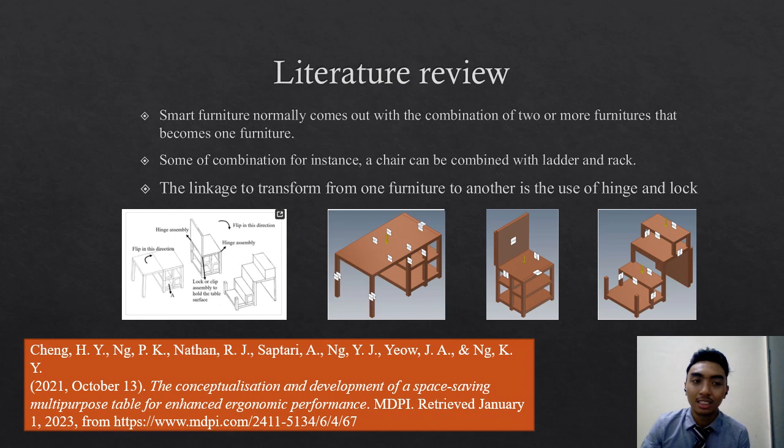The second point that I found in another article is that smart furniture is a furniture that has numerous functions since it is a combination of 2 or more furnitures. The furniture needs to be multifunctional and able to fit in compact living spaces. To prevent young buyers from having difficulty affording expensive furniture because they have a limited budget, the design must also be economical, sound with a reasonable price.

My next literature review finding is that a material that can be used is plywood. This is because plywood is very durable, lightweight, and much stronger than most other wood. This will help the furniture last much longer and surely be worth the price. If plywood is used to make furniture, the furniture will also have more of an eco design.

Let's continue with the problem statement. Nowadays, houses are starting to become smaller, especially those located in large cities. In this case, mostly traditional furnitures were too big and eat up more space, which is not suitable for this kind of house. So users will live in an uncomfortable way because they have small space to live in.

For the objective, it is to build a multi-purpose dining table that combines 2 or more other types of furniture to become one. So house owners do not need to buy separate furniture to fulfill their furniture needs. The next one is to apply basic mechanical joining for the development of smart furniture.

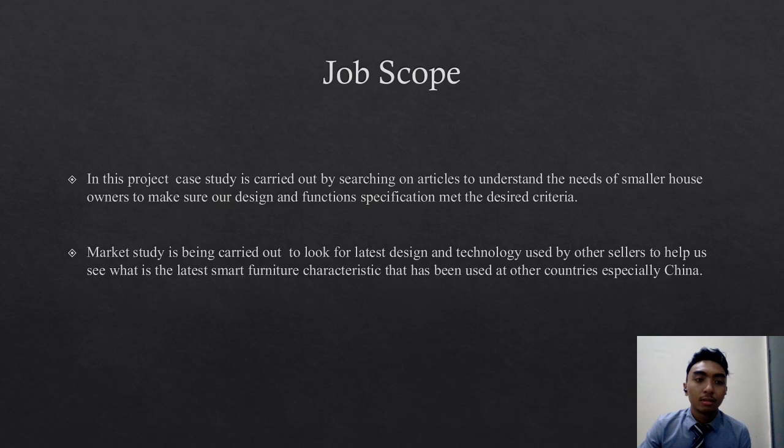So we continue with the materials used for all 3 designs. Design 1 uses pine wood, design 2 uses particle board, while design 3 uses aluminium. The dimension for design 1 is 120 cm x 50 cm x 100 cm, design 2 is 120 cm x 60 cm x 77 cm, and design 3 is 120 cm x 60 cm x 70 cm. The mechanical linkage used by design 1 is the hinge, as we can see in the photo here.

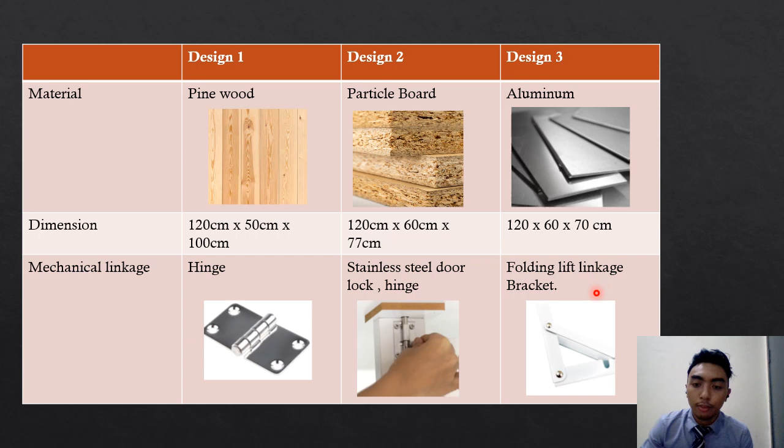Based on the market survey that we have done, there are 3 designs that we came up with. Each design has different specifications. The first design is as shown here. The first form is a rack.

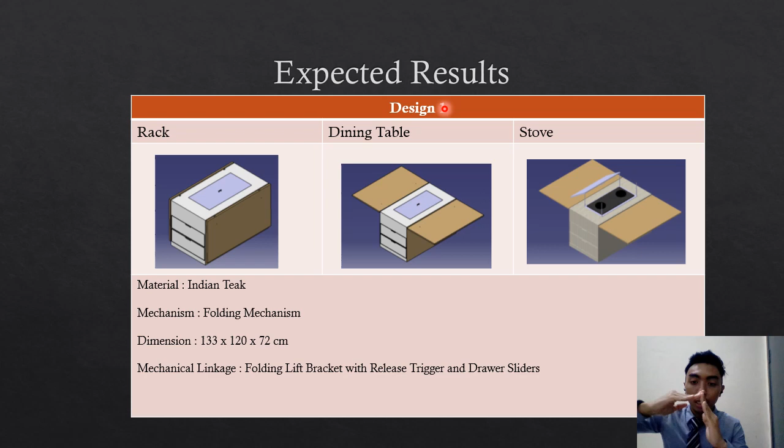It can transform into a dining table. To transform it, we just lift the side of the rack up and wait until the folding lift bracket locks it, and it will make a click sound. To close the table down, you just pull the trigger at the folding lift bracket, and you can push it down to the side as it releases the lock.

The third form is it can become a stove. To access the stove, you just pull the middle compartment upside, and you will get access to the stove. The material used for this design is Indian teak, because it is one of the best woods available.

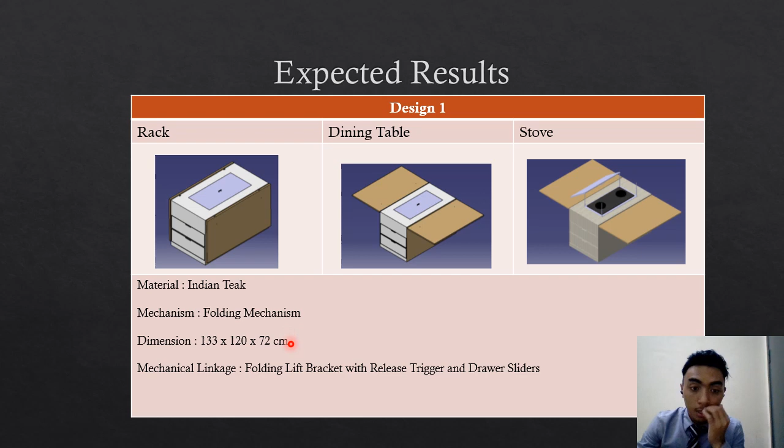The second element is the mechanism, which uses a folding mechanism. The dimension for this design is 133 x 120 x 72 cm height. The mechanical linkage for this design is a folding lift bracket with release trigger and drawer slides.

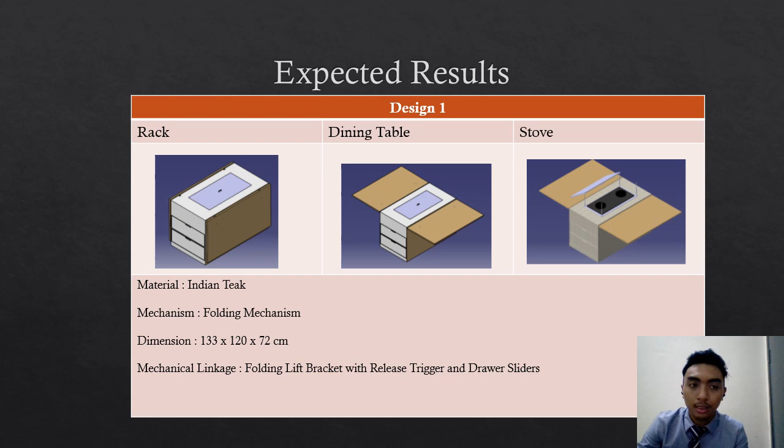For design 2, here is the design. It started as a drawer rack. The second form is a dining table with chairs. To transform it, you just pull the chair backwards until it reaches the limit of the chair railings.

To transform it to the third design, with the liftable hidden compartment, you just lift the middle compartment up and you'll get access to the hidden compartment. The material used by this design is marble and redwood, and the mechanism is a sliding mechanism. The dimension for this design is 130 cm x 87 cm x 72 cm high.

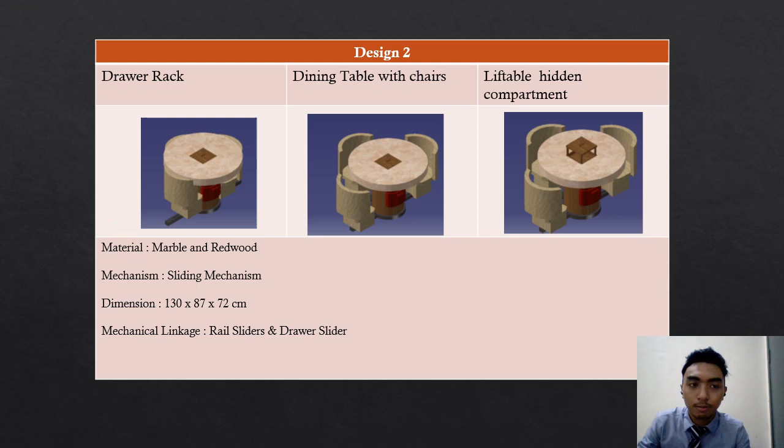The mechanical linkage used for this design is rail sliders and drawer sliders. For design 3, the final design, it started as a rack, and it becomes a dining table by pulling the top part of the rack down, and it slowly becomes a table. Inside this drawer, if you pull up, you can slide out a chair.

The material used for this design is redwood and steel, and the mechanism is a sliding mechanism. The dimension is 120 x 66 x 71 cm. The mechanical linkage is a wall mounted hinge bracket, rail sliders, pin pivot, and spring.

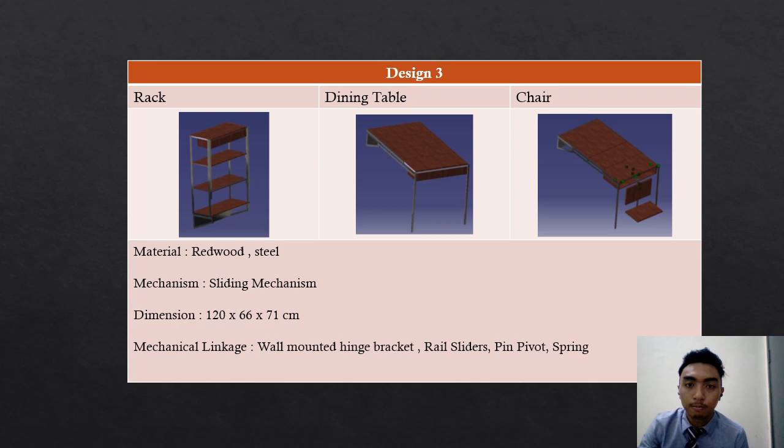So for the mechanical linkage, as I mentioned, the first one is the folding lift bracket with release trigger. The second one is chair rails and rail sliders, and the third one is the wall mounted hinge bracket.

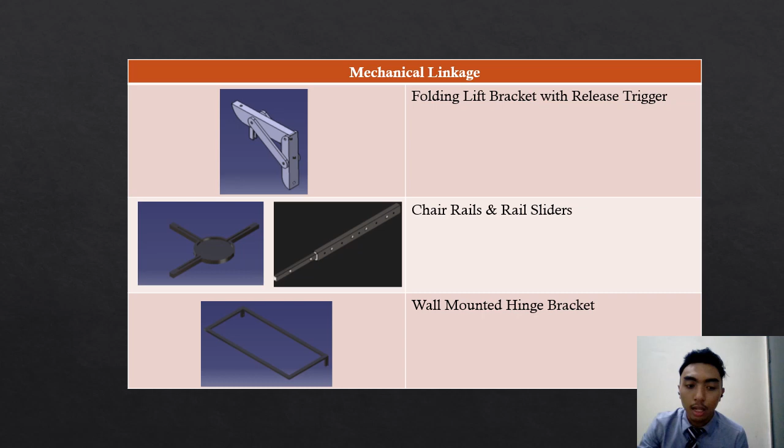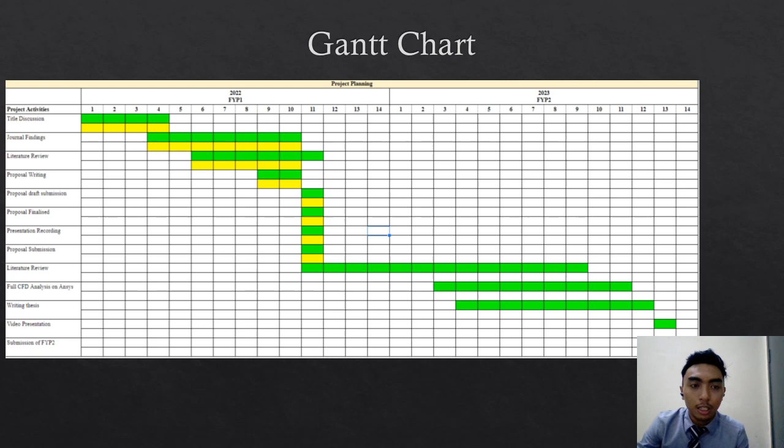So that's all for me.